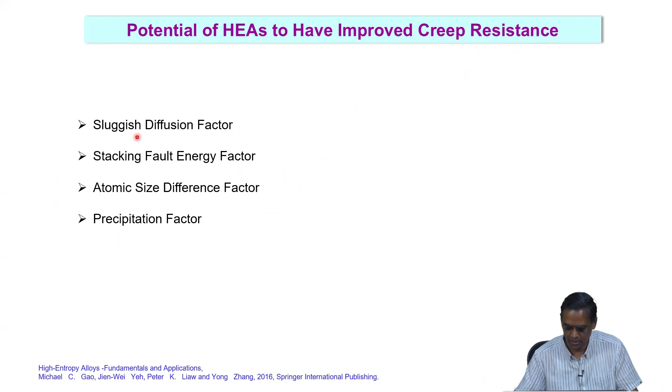Most of the FCC high entropy alloys have very low stacking fault energy. Then there is the important aspect of the atomic size difference factor, which we will also discuss in terms of how it improves the creep resistance, and finally the precipitation factor. So how are all these factors going to improve the creep resistance? Let us spend some time on this sluggish diffusion factor.

If you take the diffusion and dislocation creep models or mechanisms, the steady state creep rate is directly related to the diffusion rate in the alloy. So whether diffusion or dislocation creep, the diffusion rate is the primary parameter you have to look at. And the activation energy for creep is essentially equal to that for diffusion. Especially in diffusion creep, whatever activation energy you derive can be directly correlated to the creep.

Sluggish diffusion in high entropy alloys has the benefit of better resistance to creep. How are we going to qualify this statement? Grain boundary sliding is also inhibited, because diffusion in the vicinity of the grain boundaries to support diffusion and dislocation creep is sluggish. So this leads to an enhanced resistance to creep. When diffusion is the rate controlling step, sluggish diffusion is supposed to improve the creep resistance.

And when we are talking about a multi-principal component alloy, the component having the slowest diffusion rate could become the rate determining step in most high entropy alloy systems. This demonstrates the benefit of high entropy alloy compositions, which contain appreciable amounts of major elements. If the slowest component is added, its power to determine the creep rate would be significant.

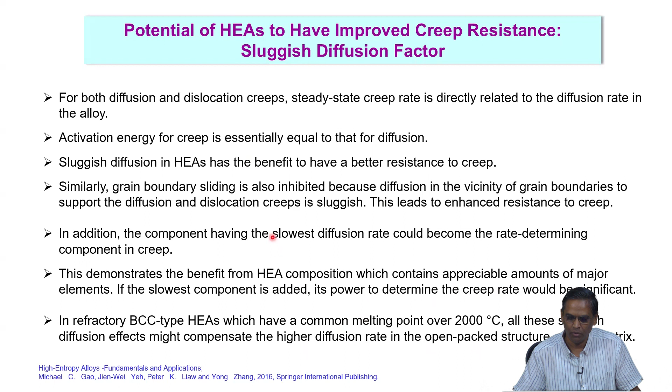That is the knowledge as of today. So let us look at the stacking fault energy factor. Solute addition has been found to lower the stacking fault energy, such as what we have seen in common alloys like copper-aluminum or copper-zinc, due to the interaction between the solutes and stacking fault. And yesterday I was also talking about the Suzuki effect, right? The segregation along the stacking fault is also a Suzuki effect, something like that.

So it is well known that low stacking fault energy pure metals and solid solution strengthened alloys have low creep rate. This is already a known fact in the literature. This trend can be explained because low stacking fault energy makes it difficult for a dislocation to overcome the obstacles by cross slip. This again we discussed yesterday. So this makes dislocations mainly use the climb process to overcome the obstacles, although the actual model or mechanism is still not very clear. This trend suggests that low stacking fault energy has an advantage in reducing the creep rate.

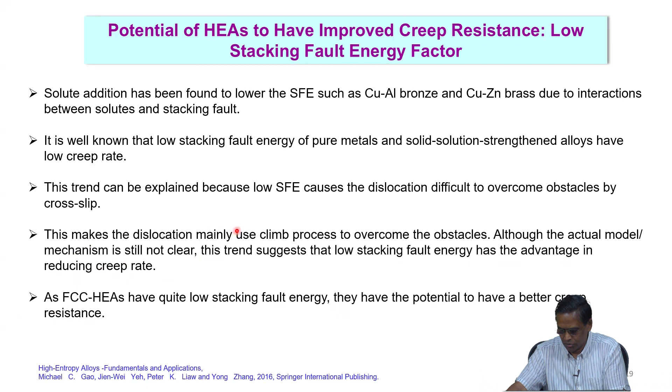So wherever you have an obstacle for the diffusion or any dislocation migration, especially in a three-dimensional motion, that is also supposed to reduce the creep rate. So if you look at the FCC high entropy alloys, they have quite low stacking fault energy, so they have a potential to have better creep resistance. So this is another factor which is going to significantly contribute to the creep resistance.

Coming to the atomic size difference factor, if you take polycrystalline nickel, solid solution strengthening has been found to increase the time to fracture under the same stress, because this is general knowledge from solid solution strengthening. In addition to that, a large atomic size difference gives a large creep resistance, that means higher stress at the same stage 2 strain rate. When you say stage 2 strain rate, it is the steady state creep rate. So even a larger atomic size difference could reduce the stress component from 5 to 3, as mentioned above. Furthermore, higher content of solutes gives smaller creep rate. So more mixing promotes smaller creep rate.

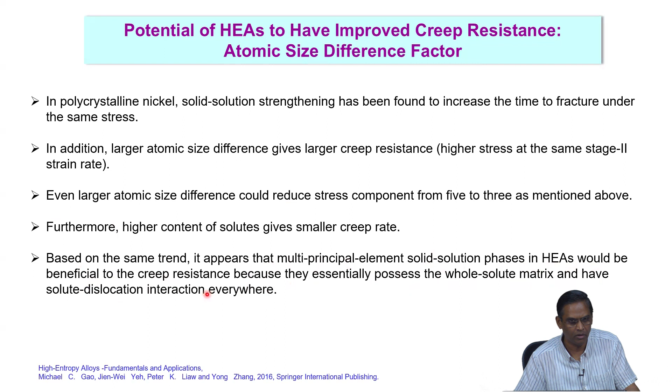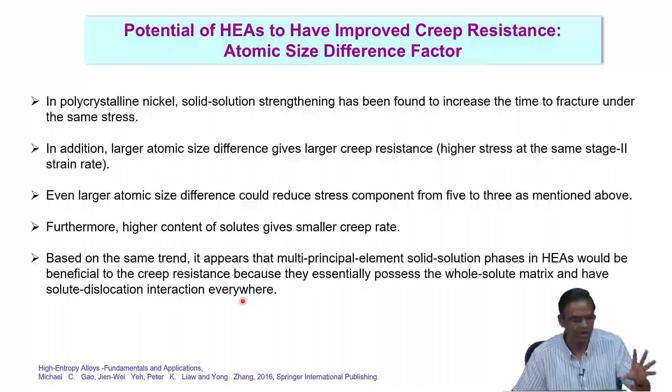So from this trend, it appears that multi-principal element solid solution phases in high entropy alloys would be beneficial to the creep resistance, because they essentially possess a whole-solute matrix and have solute-dislocation interaction everywhere. So this is a very important point. The whole solute matrix has solute-dislocation interaction at every point, because it's already a strained lattice. So let us look at what we already know.

In nickel-based superalloys, the gamma prime phase not only enhances the high temperature strength, but also increases the creep resistance. And of course, the variable is the gamma prime phase fraction. Higher volume fraction could increase the creep resistance. For example, if you take the Nimonic series, 80A, 90, 105 and 115 alloys, they have gamma prime fractions of 0.17, 0.18, 0.32 and 0.62 respectively, and also have improved creep resistance. The temperature of the Nimonic 115 alloy for 1000-hour creep life at 137 MPa is higher than the first by about 120 degrees. That means Nimonic 115 alloy has better creep resistance than Nimonic 80A. So that is the idea.

In addition, the lattice misfit between gamma prime phase and gamma matrix, and also the solvus temperature of the gamma prime phase, are all important factors for creep resistance. Small lattice misfit means less coarsening rate of gamma prime precipitates, and high solvus temperature means higher thermal stability of the gamma prime phase at higher working temperatures. These ideas are all well known, but why are we discussing this? Suppose you bring all these ideas into high entropy alloy design, then what happens? So that is the idea.

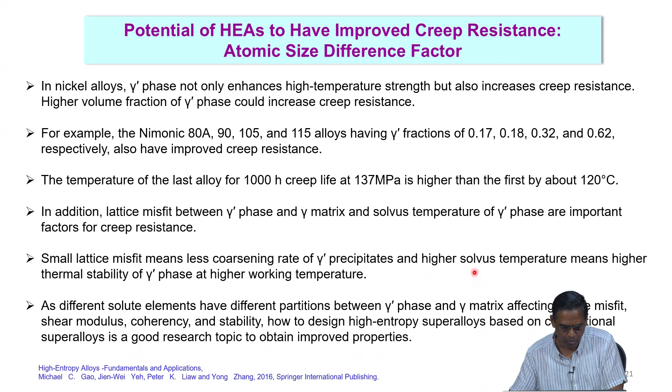Different solute elements have different partitioning between the gamma prime phase and the gamma matrix, affecting the lattice misfit, shear modulus, coherency and stability. Then how to design high entropy superalloys based on the conventional superalloys is a good research topic to obtain improved properties. So these are some of the guidelines we have already got from the existing conventional alloys, and they can be used to design high entropy superalloys for improved creep resistance. So these are all other important points to observe.

The last one is the precipitation factor, and small addition of boron and carbon for forming boride and carbide particles could increase the resistance of grain boundary sliding. Grain boundary sliding is one of the primary creep mechanisms. So if the precipitates are there on the grain boundary, they will stop the sliding. That means it resists the creep.

For example, Key and Knowles tested an experimental second generation superalloy in creep at 950 degrees centigrade and 290 MPa. Addition of 0.09 weight% of carbon and 0.01 weight% of boron could improve the rupture life from 10 hours to 100 hours. So either you look at the creep strain or the rupture life. These are the two types of tests that high temperature people do, right?

This is because the small carbide, M23C6 type, formed along the grain boundaries. So the improvement is significant. It's about 10 times that without the small addition of carbon. So this method also can be used for improving the creep resistance of polycrystalline high entropy alloys.

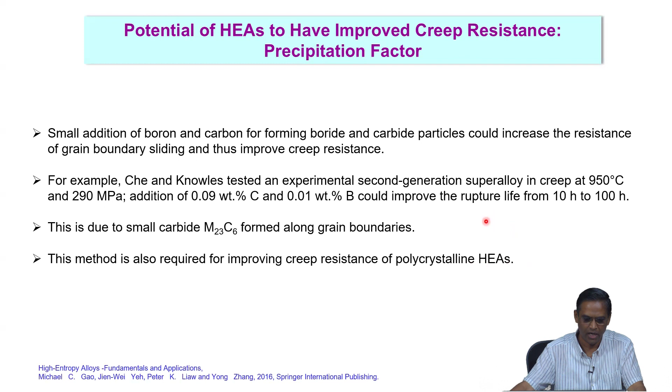So we have some idea of all these factors: sluggish diffusion, atomic size difference, stacking fault energy, precipitation factors. All these are going to affect the creep resistance of high entropy alloys. If you look at the literature, the experimental creep data available on these high entropy alloys is almost nil till 2015. Very small experimental data is reported, and this is one among them that I am showing.

He et al. reported the steady state flow behavior of the cobalt, chromium, iron, manganese, nickel high entropy alloy in strain rate jump tension tests at temperatures ranging from 1023 to 1123 K. They used the power law to fit the flow behavior with the stress and temperature shown here.

So what you see here is the steady state strain rate, that's a creep rate, versus stress, and then you have a creep rate versus inverse of temperature plot. What you see here is two distinct regions, region 1 and region 2, and we have tests conducted at different temperatures, shown here.

Region 1 with a low stress exponent at low strain rates or stresses, and region 2 with the high stress exponent at high strain rates. So what is this stress exponent? Why do we try to get this stress exponent? Any idea? Which mechanism is it for?

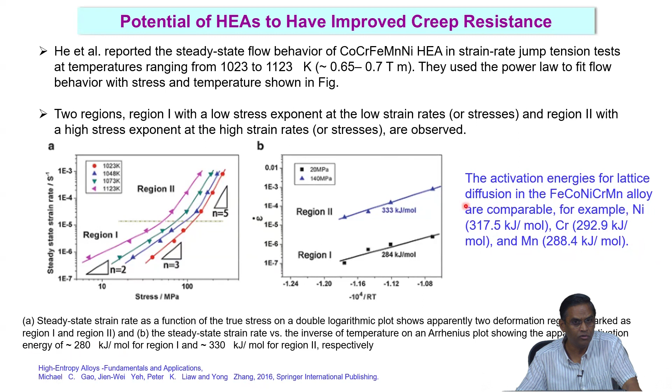The important point to note here is that the activation energies for lattice diffusion in this iron, cobalt, nickel, chromium, manganese alloy are comparable. For example, for nickel it is 317.5 kilojoule per mole, chromium 292.9 kilojoule per mole, and manganese 288.4 kilojoule per mole. These values are very close to what is calculated for this alloy, so you can say lattice diffusion is the primary mechanism.

The stress exponent of about 5 in region 2 suggests that the dominant deformation process is dislocation climb. The activation energy of around 330 kilojoule per mole can be rationalized by the slowest diffusing species, nickel, which controls the rate process. The lattice diffusion of nickel is about 317.5 kilojoule per mole, and you get an activation energy of 330, so you can relate that with nickel diffusion, and the mechanism is basically dislocation climb.

On the other hand, the stress exponent of about 3 in region 1 suggests that the mechanism is gliding dislocation drag. However, the lower activation energy of 284 kilojoule per mole is difficult to rationalize by the slowest nickel, but when region 1 in the figure is rechecked, an activation energy the same as region 1 might be expected. This again confirms the rate controlling species is still the slowest, nickel.

Okay. So the dislocations are supposed to migrate. So if your second phase particles try to drag them, then your dislocation creep will be resisted. Okay. So that is why it is.

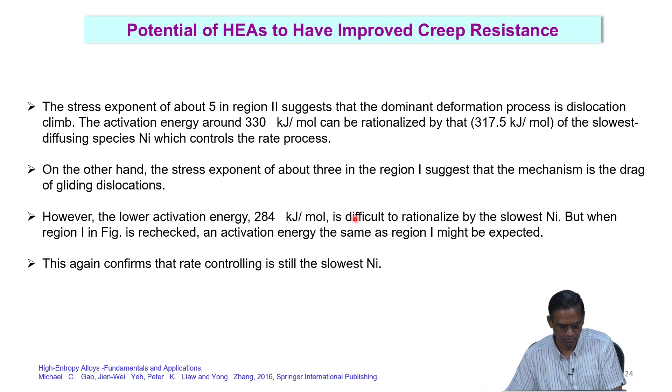And another important point I want to mention about these high entropy alloys is the structural stability, right? How stable these microstructures are. If you recall yesterday's lecture, we discussed hot hardness and then indentation creep and so on. They are all related here, because we discussed indentation at very high temperature and how resistant they are to softening basically. They are all related here to the high temperature properties.

So if you look at this diagram, what we have shown is again the hot hardness of different high entropy alloys compared with some of the conventional alloys like SKH51, SUJ2, Inconel 718 and so on. So what do you see? What is the description? Based on yesterday's discussion, can you describe this?

So you have evidence that many high entropy alloys have an exceptional high temperature strength and hardness, which originates from their excellent resistance to thermal softening. Okay, this is the bottom line. They are quite resistant to thermal softening. How do we know?

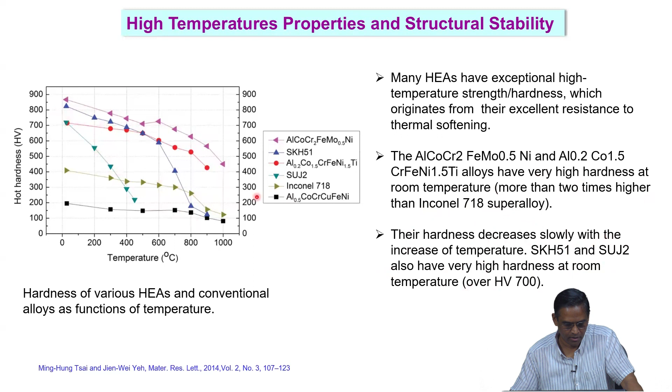So all these high entropy alloys have very high hardness at room temperature, more than 2 times higher than Inconel 718 superalloy, and their hardness decreases slowly with increase of temperature, but the conventional alloys have a very high hardness at room temperature, but they drastically change with increasing temperature. This is another important point. So what is the advantage?

This leads to a significant difference in the hardness for the 4 alloys at 800 degrees centigrade. The 2 high entropy alloys are still more than 2 times harder than the Inconel 718 superalloy, while the 2 conventional alloys become apparently softer than Inconel 718. So at 1000 degrees, the high entropy alloy is already more than 3 times harder than Inconel 718.

Also, you can note that even the soft single FCC high entropy alloy is quite resistant to thermal softening. So these are some of the interesting results comparing the conventional alloys, showing the superiority of high entropy alloys having higher resistance to thermal softening.

So what we are going to see is again some experiments conducted by Hsu et al. They calculated the high temperature softening coefficient for the aluminum, cobalt, chromium, iron, moly, nickel alloy with varying chromium content from 0 to 2. From the hot hardness versus temperature curve, he derived a high temperature softening coefficient and found that above the transition temperature, that means the onset temperature for rapid softening.

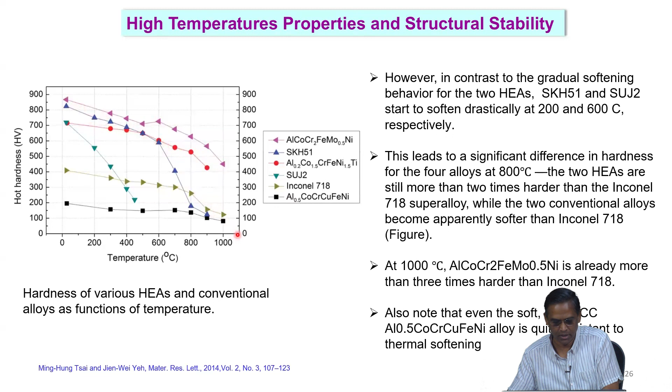is mentioned here. So above the onset transition temperature for rapid softening, the softening coefficients for these alloys are evidently lower than that of conventional high temperature alloys such as Inconel 718 and T800, as shown here. So you can see that the conventional alloys have softening coefficients much higher than the high entropy alloys.

So you can see that the softening coefficient of some of the alloys is even less than half that of a conventional alloy like Inconel 718. The resistance to thermal softening is mainly a result of sluggish diffusion in high entropy alloys. That is the belief as of now.

So above this transition, what happens? The deformation proceeds via diffusion related mechanisms, and that slower diffusion rate in high entropy alloys can effectively reduce the degree of thermal softening. So thermal softening is an important parameter to characterize the high temperature stability or structural stability of the high temperature alloys.

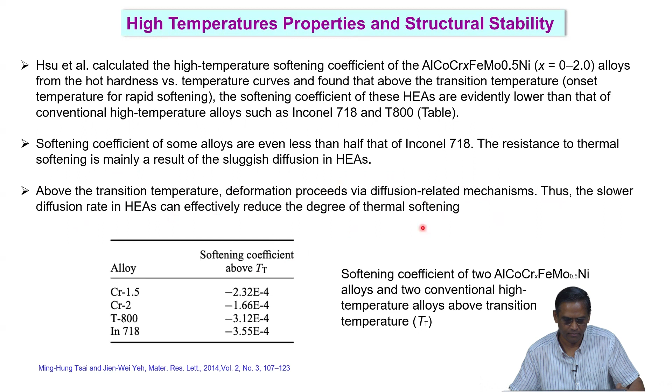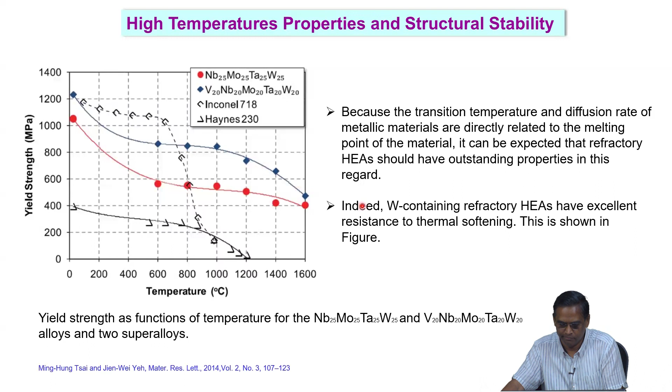On the other hand, this Inconel has a drastic transition beyond 600, and Haynes also softens much more rapidly compared to these two high entropy alloys. So these results clearly demonstrate the structural stability: the yield strength of these alloys remains virtually unchanged, especially between 600 and 1000 degrees centigrade. Beyond this plateau, they have extremely high yield strength, over 400 MPa at 1600. So even at 1600 you have a difference of about 400 MPa compared to the conventional alloy, which softens significantly.

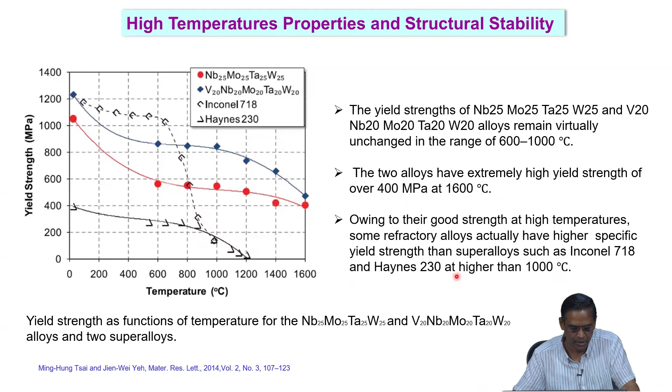Owing to their good strength at high temperature, some refractory alloys actually have higher specific yield strength than superalloys such as Inconel 718 and Haynes 230 at higher than 1000 degrees centigrade. So we can make some general statements here. High entropy alloys generally have good structural stability at high temperatures. This is primarily due to slow kinetics, from the sluggish diffusion effect. Second is the reduced driving force to eliminate defects, that is grain boundaries, interfaces, etc.

There is much evidence for the good structural stability in high entropy alloys. For example, the activation energy of grain growth for the cobalt, chromium, iron, manganese, nickel alloy, which has a sole FCC structure, is about 321.7 kilojoule per mole. This value is twice that of 304LN stainless steel, indicating significantly slower kinetics for microstructural coarsening, and growth of precipitates in high entropy alloys is also pretty slow.

And what people have tested is precipitates in high entropy alloys treated at moderate temperatures, 700 to 800 degrees. They remain in small diameters on the scale of tens or hundreds of nanometers. They are also not reporting any significant growth of these precipitates.

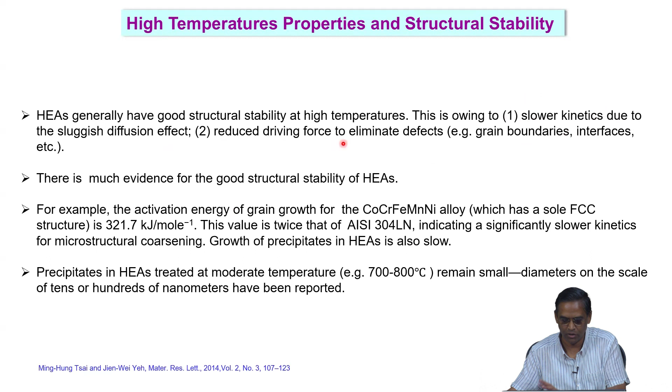So, about these high temperature properties, as I mentioned, we have very limited experimental data available in the literature, and some of the reports in the literature show these alloys being used mostly as high temperature coatings, but they are also not widely reported in most of the literature.